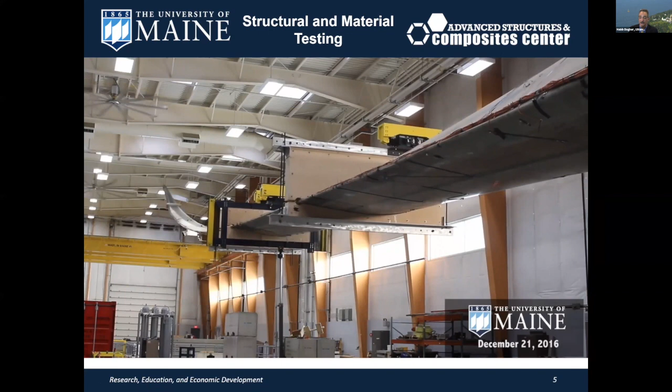To give you a sense of what it looks like inside our lab, this is an example of our wind blade test facility. And we're testing right here 165-foot long wind blades under fatigue loading to simulate 20 to 25 years of life in a very short period of time in our lab. And notice there's one actuator at the bottom moving it up and down, and it's being fatigued at the resonant frequency of the blade. That's how we could move it so easily with one actuator.

This is our wave wind facility. We call it W square wave wind facility. What we do here is we can simulate ocean environments by both simultaneously creating a wave environment as well as a wind environment on top of it. It's the only facility of its kind in the United States. Right below you is a wave basin, and above you is a wind tunnel. It's an open jet wind tunnel.

What you see in the foreground is a floating wind turbine being tested at 1/50 scale. So basically shrinking the size to about 1/50th and testing it in this environment to figure out how the bigger units will perform offshore. This is an example of how we test structures that float in the water, whether it's a boat or testing a way to protect cities from extreme storms.

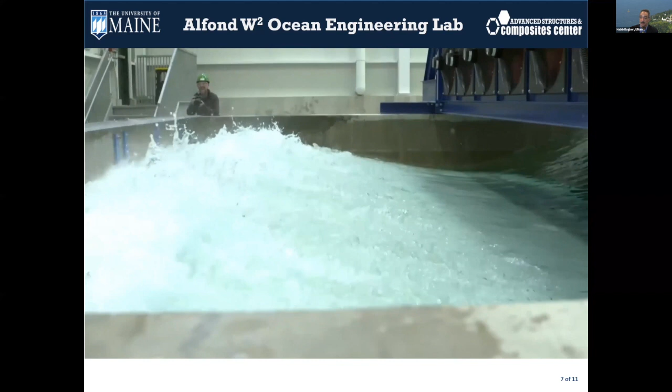But you can see here we can create waves of different heights and different frequencies and different directions. We can make the waves come from different angles. And then on top of that, we create a windstorm. And the wind will change with height, just like it does offshore. So we can change the speed of the wind as you rise above the water. We can change the wind turbulence intensity. So almost recreate, if you wish, an offshore environment in our laboratory to test new technologies that we want to deploy offshore. So if you're ever back in Maine, we'd love to show you that facility.

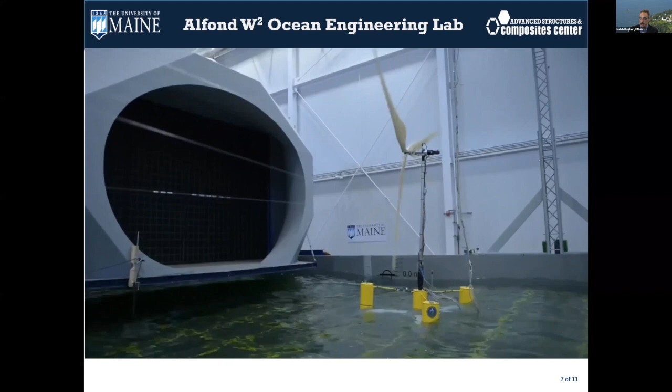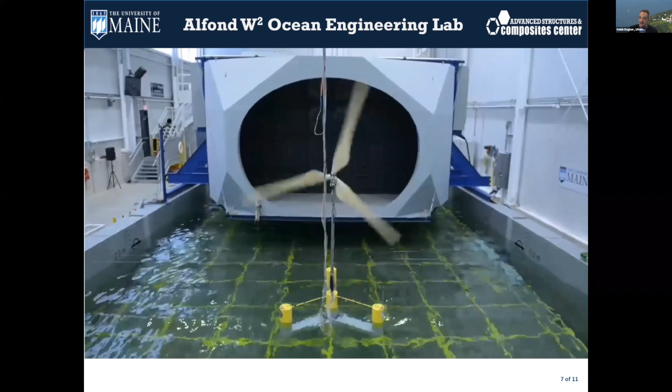This is a 1/50 scale version of a 6 megawatt floating turbine, being subjected to almost a 50-year storm right here. To put things in perspective, a 50-year storm has about 60-foot high waves from peak to trough.

Now let's talk about offshore wind. Offshore wind is a technology that the world is embracing in Europe, in the United States, in Southeast Asia, to help develop clean energy for coastal cities and coastal environments. The majority of the world's big cities are on the coast, and there's a good opportunity here to provide clean energy through offshore wind.

To give you a general idea here, within 50 miles of the US coast, there's enough offshore wind capacity to power the country two times over. In the Gulf of Maine, there's 156 gigawatts of offshore wind capacity, and it takes less than 5 gigawatts to power the state of Maine. That's how much offshore wind capacity that we have. The big issue in Maine is that we have deep waters off of our coast.

In Europe, the first offshore wind farm was erected close to 30 years ago. There's over 5,500 turbines in Europe, but they're all fixed to the seabed because they build them in shallow waters. Maine has deep waters, and anytime you're over 150 feet of water, you can't cost effectively fix the turbines to the seabed. You have to float them. And almost 12 years ago, we developed the first floating offshore wind research team in the country at the University of Maine. I'll tell you more about that later.

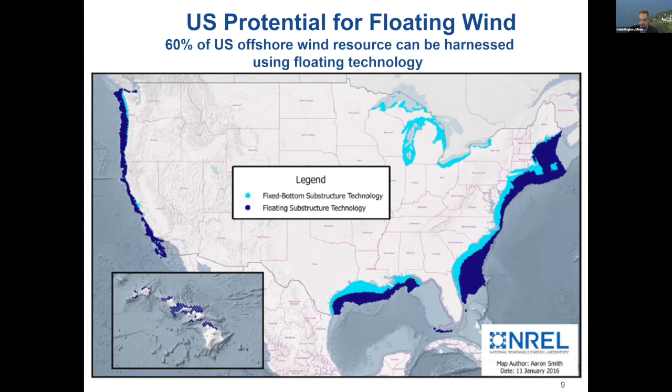So let's go back to Maine a little bit. We started working on offshore wind when gasoline prices, heating oil prices in Maine went up to $4 a gallon back in the first decade of this millennium. And Maine essentially spends close to $3.6 to $5.8 billion per year on fossil fuels. That's heating oil, that's gasoline, that's natural gas. Most of this money leaves the state of Maine because we don't have those resources in Maine.

So we're shipping away every year close to $4 to $5 billion a year, and that leaves the state of Maine. Think about if we can keep some of those dollars in Maine and put them to good use by developing our own renewable energy resources. What we found is offshore wind is the biggest opportunity that the state of Maine has. Not only the only opportunity, but the biggest opportunity.

What we calculated is that if we harnessed only 3% of the Gulf of Maine area, just 3% within 50 miles, we can heat every home and drive every car. So the question really is, where do we pick that 3% so we can electrify heating and transportation in our state?

How do we float wind turbines? There are 3 major categories of floating wind turbines, and the designs are all borrowed from the oil and gas industry. So we've taken floating oil and gas rigs, which have been built for decades, and figured out how to turn them into floating wind turbines. The first family of designs is called the spar. The second is a semi-submersible, and the third is a tension leg platform.

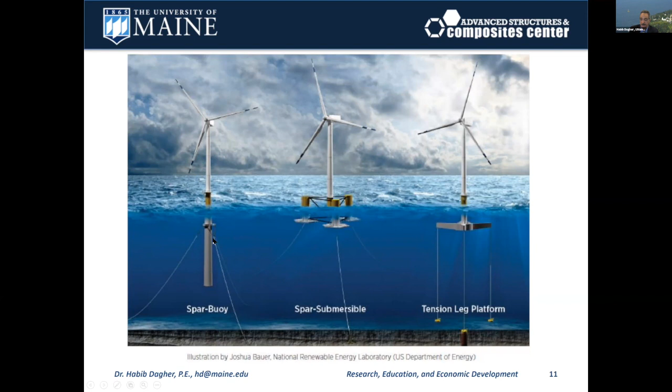Whereas both the semi and the spar can be towed out to sea on their own. I'll show you that in a minute. There's essentially a gold rush right now to design and build floating turbines across the world. There's over 40 designs out there, and they're all competing for a position in this growing industry.

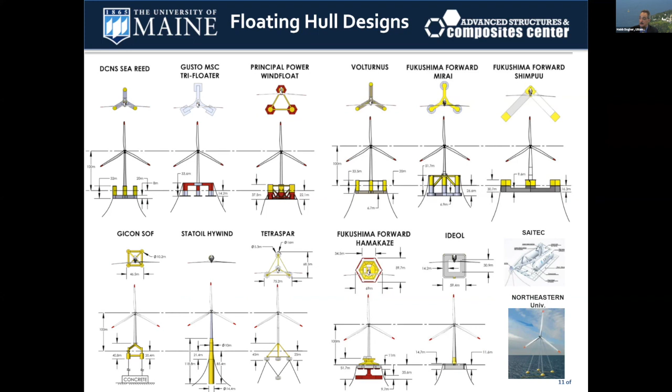There are countries competing with other countries to get floating turbines out there first right now. And in the United States, the University of Maine and the state of Maine are likely to build the very first commercial scale floating turbine and lead the country in that direction.

We started our program about a decade ago, but back in May 2013, Maine made history, and UMaine made history because we built and deployed the first grid-connected offshore wind turbine in the United States. People don't know that, but we did. We built the first one.

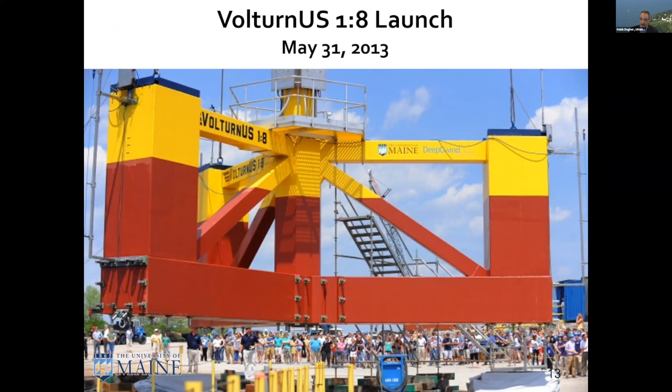So in May 2013, we put this unit in the water. It was made at UMaine in our lab, taken on 3 trucks to Brewer, Maine, assembled in Brewer, Maine by Cianbro, put in the Penobscot River and towed out to sea. And this is how we towed it down the Penobscot River. You could see here we have 3 flotation columns, 1, 2, and 3 in each corner. That's how it works like a trimaran. And this is a 1:8 scale version of the bigger unit. So that's how we towed it out to sea.

And then we got it to Castine and moored it to the seabed. When we got to Castine, we had already pre-installed 3 mooring anchors, 3 mooring lines, and tied it to each corner of the hull. And we had a pre-installed undersea cable that brought the power back to shore. We hooked that up, and we ran that for a year and a half. And because it's a 1:8 scale, it saw very extreme environments in a very short time relative to its size.

And we had over 50 sensors on board. And the purpose of that was to figure out if we can design a hull that will last 500 years in the Gulf of Maine. And the good news is we've proven that we can. And this is an example of one of the first storms we encountered in December 2013. It was called Winter Storm Electra.

So what you see blowing across here is actually snow. This is a snowstorm blowing across. And you can see the size of the waves and the white caps relative to the size of the hull. Remember, this is a 1:8 scale version of the bigger unit. And relative to the size of the hull, these were 60-foot waves. Notice the white caps, and notice that the hull isn't even moving. You can't even see it move in a 50-year storm. And that was the aha moment, that our designs work, our computer models work.

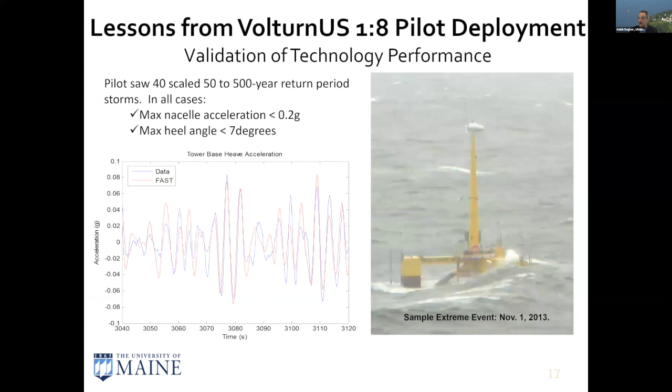And what you see in blue and red are our computer models versus the actual measurements of the motions of the hull. Essentially, we know how to predict the motions of these hulls in these 500-year nor'easters.

So the next step now of the project is to build the bigger one. So we're going to build one unit, just one hull. But it's not just one hull, it's an 11 megawatt unit. It'll be the biggest floating turbine in the world. And each blade in that unit will be the size of a football field. So it's a big unit. And that unit will be capable of providing enough electricity for close to 5,000 to 6,000 Maine households. UMaine has over 60 patents to date on this technology.

And it was designed so we can fabricate it here in Maine. Our goal is to start construction next year and to have it off Monhegan Island to be tested starting in 2023, end of '23, beginning of '24.

The good news is the National Renewable Energy Lab did a study which they published last year, and that showed that this technology, the UMaine technology, when scaled up to full-scale farms, when we're cranking these things out, we can get down to below 6 cents a kilowatt hour. So it's a very competitive energy resource.

Because of all of that, we were joined by two major corporations that are invested in the technology. Each has committed to invest $50 million. One company is called RWE, and the other one is the Mitsubishi Corporation through its subsidiary in the US called the Diamond Generating Corporation and Diamond Offshore Wind.

These two companies are some of the best in the world in their field. RWE is the second largest offshore wind developer in the world. They're a German company. And both of them are investing in Maine to help us build this hull.

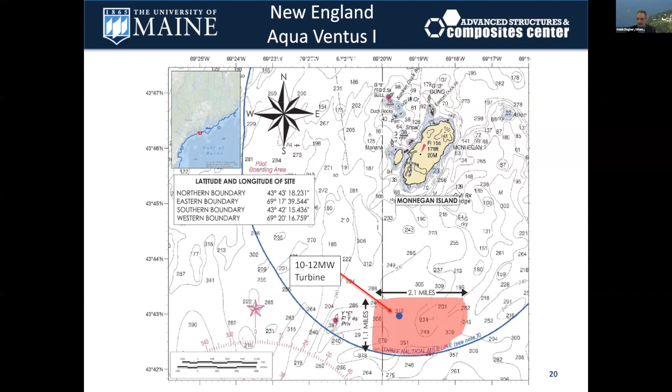This is what's unique about our technology: we can make it locally. And it can be built like a concrete bridge. If you've seen a segmental concrete bridge being built, essentially this is how we're going to build this. So rather than try to develop a technology and figure out how to industrialize it later, we started with an industrialized concrete construction method for bridges and applied it to a hull. So we have an industrialized technology right off the bat.

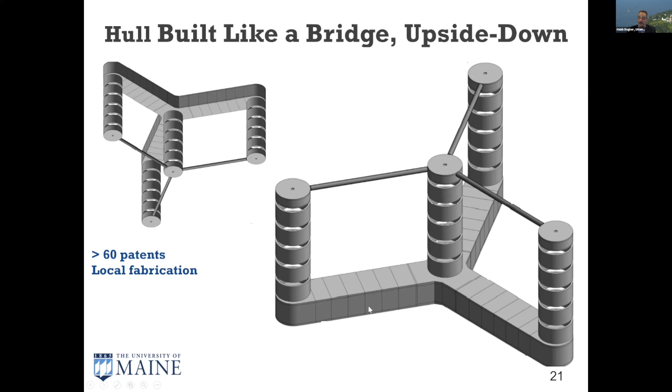And then the superstructure of the bridge, the roadway itself, is made with rectangular boxes that are filled with air as well. They're made near the site, put up there and squeezed together. Now, if you take that bridge and flip it upside down, you've got our hull. So the idea here is to turn bridge builders into hull builders and be able to make it right here in Maine. It's a lot easier to build this than a bridge, because you're starting on the ground and building it up, then put the whole hull in the water and tow it out to sea.

And between each layer, between each can, there's essentially an epoxy. And then there's steel post-tensioning tendons, like big bolts, if you wish, that are squeezed vertically to tie the whole thing together. That's how strong these are when you make bridges out of them. But think about using the same technology to build hulls. That's the invention that Maine has developed.

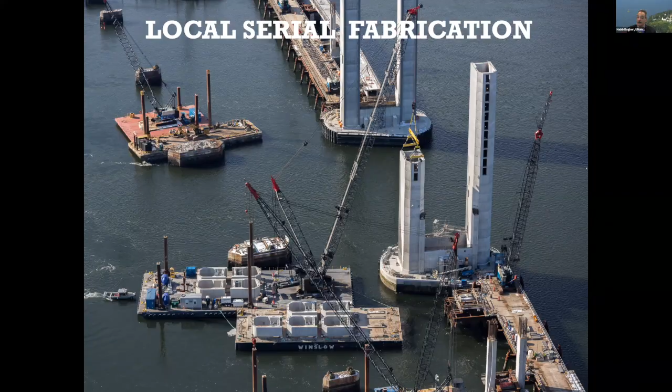Now, the goal here is to try to make some of these boxes and cans in Brewer, or make them in Searsport. And we're also looking potentially at Eastport as one of the facilities to assemble them. In Searsport, the goal is to assemble the hull and tow it out to sea.

Now, how do we moor it to the seabed? We can moor it with steel chains or with synthetic mooring lines. But at the very end, there's an anchor into the seabed. We're likely to be using what we call a drag anchor. This is what it looks like. It looks like a big plow, essentially. And you tow it along the mud with a tugboat. And as you tow it along the mud, it embeds itself into the mud and sets itself in.

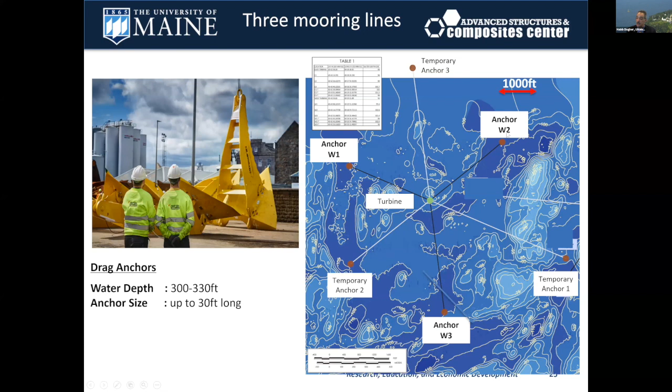It could be embedded 40 feet or so until you have enough tension on the tugboat to hold up the turbine. So you test it out to the tension that you need. And then you hook it up to the turbine. Each turbine will have 3 mooring lines like that on it.

Over the last decade, the University of Maine has been busy collecting data on the environment in the test site off Monhegan Island. We had bird biologists and fish biologists and marine mammal biologists study who lives under the water, above the water. We've taken tags and put them on marine mammals to see where they move around, how they move around.

We've had the New Jersey Audubon work with us and put a radar on Monhegan Island and scan the skies for over a year to look for birds and bats and identify how they fly and where they fly. We also had bird biologists go out there and count the birds and the types of birds that would fly over the test site. So this was the most studied test site from an environmental perspective in the Gulf of Maine that we know of.

After all this data has been collected, now we're going to take a single hull, put it off Monhegan Island, and see how that impacts its environment. We're going to see how the birds' behavior changes. We're going to learn over 5 years afterwards how the fish behavior may change, what the impact might be on the lobster industry. So these are the kinds of studies we're going to be doing under that one turbine, so we can develop the scientific and engineering basis for going the next step.

And to show you the kind of numerical tools we use to design these hulls, we used computer models developed or advanced at the University of Maine to figure out how the hull actually moves with the winds and the waves. And these numerical tools are visualized right here on the top. On the top, you see a 50-year storm, 50-year waves, 60 feet high, coming at the hull. And you can see how the hull moves under these waves. Now, this is exaggerated, so you can see it doesn't move that much.

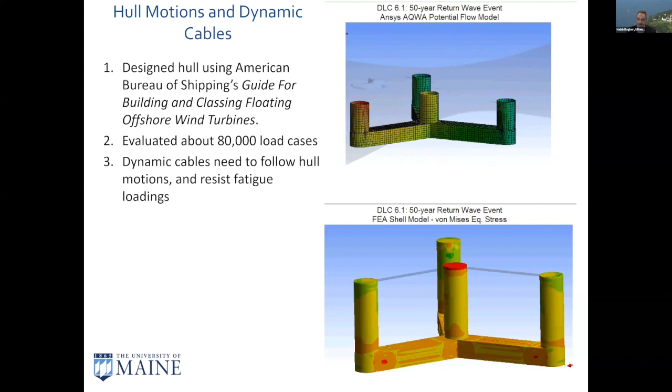How do the electric cables come to shore? Now, typically, if you have a big farm, and hopefully in the 2030s in Maine we'll have those, a big farm might have 50 turbines in it, about a mile apart. What you do is you put them in rows of, say, 10 turbines or so, and each turbine would have a cable coming out of it, but each row would have one collection point. And then each collection point from each row comes together to a collection point offshore, and you have one cable coming back to shore.

Now you try to bury the cable into the seabed to the extent that you can. From each turbine, the cable comes down through what we call a J-tube, and it makes a lazy wave and goes back into the seabed. It's tied to the seabed with a tether or an anchor, and then we try to bury the export cable. For the Monhegan line, we have about a 24-mile export cable for the Monhegan projects, which we plan to bury to the extent that we can.

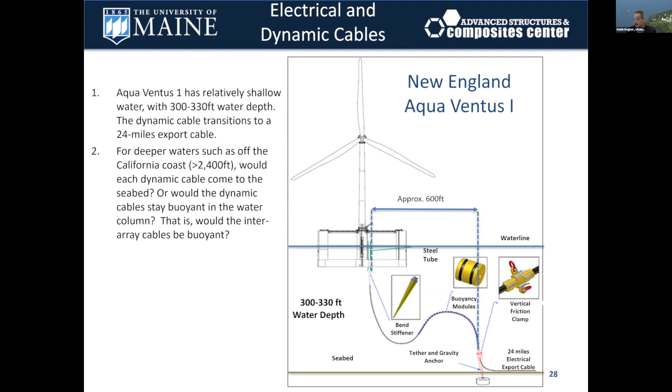Notice what the cables look like. There's a lot of questions that we got asked: would these cables kill the fish, would they have EMFs on them, and so on and so forth. Well, the good news is we've been using these kinds of cables in the Gulf of Maine for decades now.

Give you an example. How do we power the islands off the coast of Maine? Actually, we run cables from the mainland to many islands to power them, and these are similar to the cables we'll be using. For example, Islesboro has had a subsea cable connecting it to Northport since 1955, for over 60 years. And the cable was replaced in 2015. It's a 4-inch diameter cable, and it's buried about 6 feet in the mud.

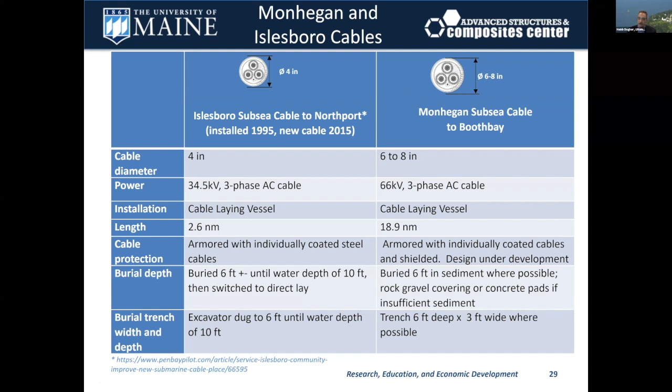Now, our cable will be a bit bigger. It'll be 6 to 8 inches in diameter. You can see it here on the right-hand side. And our goal is to also bury it in the mud to the extent that we can. As you know, in the Gulf of Maine, the seabed has rock outcrops that might prevent us from burying it in certain locations. Now, how do we know how to run the cable, where to run it and how to bury it? You do offshore surveys.

So on the right-hand side is our proposed cable route from the Monhegan Island test site to Boothbay Harbor. We plan to take the cable to Boothbay. And the question is how can we find mud pockets to do it? We've done some studies to figure out where we think the mud pockets are. Then we send ships out there that send seismic waves to the seabed and help us figure out where the mud pockets are. And on the left-hand side is the cable from Islesboro to Northport that's been around for decades.

Our cable on the right-hand side and the cable on the left-hand side are essentially the same. They're both going to be buried the same. Neither the left cable nor the right cable is going to have any bigger impact on the fish or the wildlife. People fish over that cable right now off Islesboro and have been for decades.

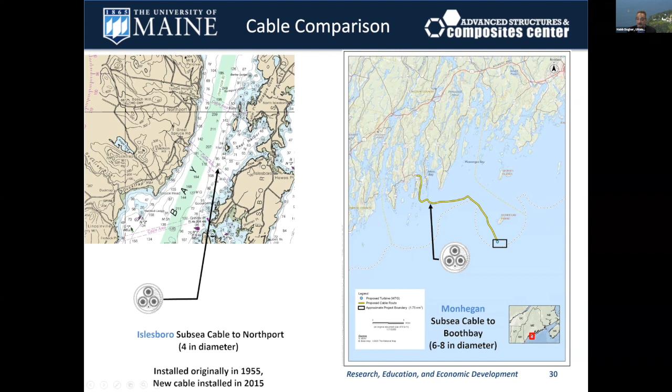Now, how do we know if we can bury the cable? As I said, we did a survey. We ran specialized vessels that send seismic waves and other types of waves to the seabed to figure out what the seabed looks like. We did that last month in April, and we're analyzing this data as we speak, in real time. This is just a snapshot of the data we've collected to give you a sense of the resolution of the data.

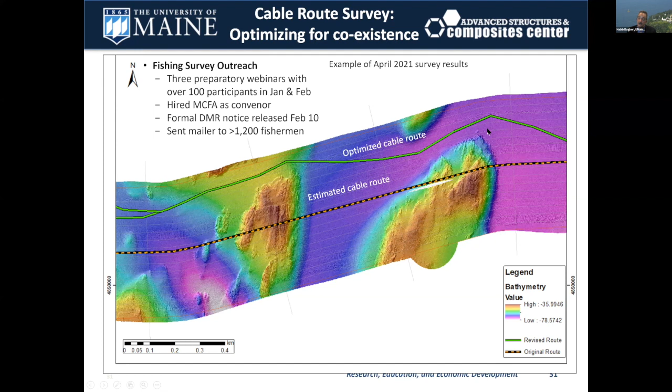What you see in brown and yellow and green are outcrops where you have rocks. What you see in purple are essentially deposits of sand and mud. Initially, we planned to have the survey along the line that's dotted. And after we've run the survey, we're going to try to move the line to the green location, where there are mud pockets, so we can bury the cable 6 feet and allow most fishing to take place normally there.

Notice that these are big units. These are very big, and they're tensioned to hold up the hull. And therefore, they're not going to move around. You're not going to have a whale or a marine mammal getting tangled up in that. It's not like a very small fishing line. So there's a lot of tension in it.

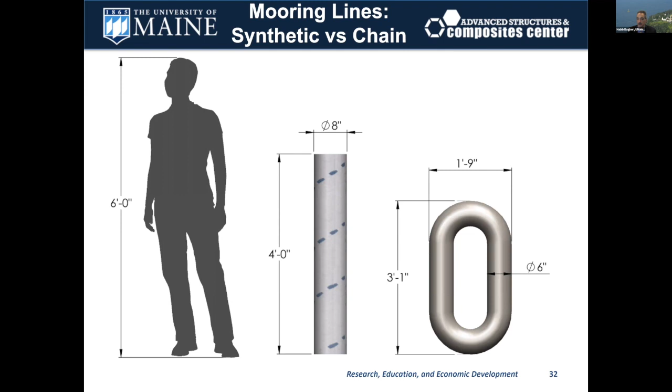It's very big. And experience has shown us over decades in the oil and gas industry, which has used these kinds of mooring systems, that the marine mammals and the whales go around them. They don't run into them. We have videos of whales going around these in the oil and gas industry. Now, this has been a long history in the state of Maine.

This has not just happened overnight. I've been at it for 12 years, and I'm the old person in the room right now in offshore wind in Maine. But back in 2008, the governor, Governor Baldacci at the time, put together an ocean energy task force, which I served on with Angus King and many others. It was a bipartisan task force. They put a report together that recommended 5 gigawatts of offshore wind in the Gulf of Maine to electrify heating

Following that, in 2010, Maine voters actually voted to provide the university $11 million to get going and design some technologies and do the demonstration project. So we are under a unanimous mandate by the legislature, and a vote by the people of Maine to do this. So we're doing what the people of Maine have asked us to do for the last 10 years.

Today, in this last couple of years, Governor Mills has put some ambitious targets to achieve state carbon neutrality by 2045. To do that, we need offshore wind. We also need other forms of renewable energy to work together, but offshore wind is key to get there. So what's the state of Maine plan? The state of Maine is developing an offshore wind plan right now by working with constituents across the state and all users of the sea. And the plan calls for crawl before you walk, walk before you run, do it right.

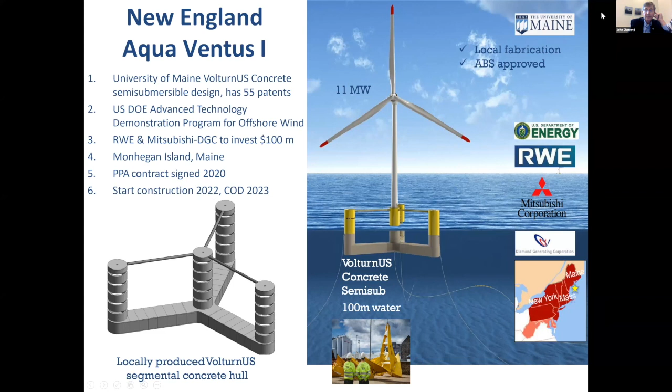Question: is there any practical application for integrating a submerged turbine suspended below the floating platform? For example, to have two power generating devices on the same platform? Very good question, actually. Thanks for asking that. We've looked at that, actually. We've looked at to see if we can locate wave energy devices and tidal energy devices or current energy devices on this. You can, but it's not quite clear that it's cost effective. I think the more energy generation devices you have, the more complex the system is, the more O&M you have to do. But it's certainly worthwhile studying further. It's on our radar screen. Thanks for asking the question.

Very good. Question, and you've addressed this a little bit, but could you elaborate a little bit more on the concerns of some in the fishing industry about this project, specifically the research array? Could you talk about not only what those concerns are, but also explain more about what the university is working on to help the fishing industry navigate in and around the research array? Sure, I'll take a first crack at it, and I'll hand it over to Genevieve, because Genevieve lives and breathes the fishing industry. Representative Genevieve McDonald, I had a great pleasure to work with her, and she's brought a lot of the concerns from the fishing industry to us.

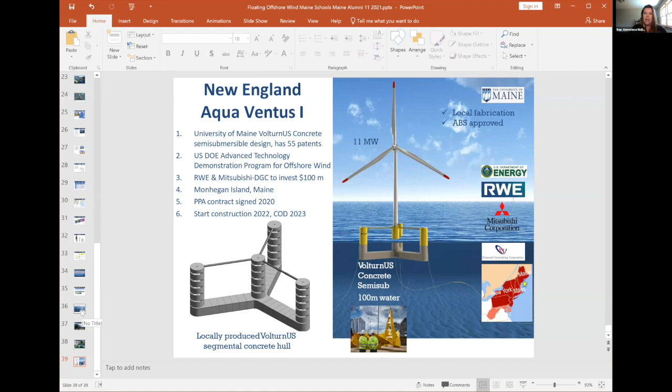So to the environmental impacts, there is a NEPA process, there is an environmental review and assessment that is part of the permitting process. And so I think a lot of those questions will get answered as this process moves along, both for Monhegan and for the research array. And then to speak to displacement, the fishing industry is really concerned about the development that we've seen in Southern New England and in the Mid-Atlantic. These are really big commercial scale leases, and they have displaced fishermen in those areas.

And so I would say that the scale that Maine is working at, to start with a single turbine and test the feasibility, how close can fishermen feasibly operate, and then expanding that to a 12 turbine research array, still taking those considerations into conversations, into dialogue, into stakeholder engagement, and really seeing how we can coexist is the right path forward.

Thank you, Representative McDonald. Thank you for your leadership in the legislature on this issue as well. Thank you. I'm going to go back and listen to the rest of that hearing when we finish here. Yeah, I need to get back and give my testimony too. Oh, right. I'll run through these other questions then too.

Question about the choice of the Monhegan site. What led you to choose that site, and what role will the Monhegan site play in the development of the research array? Thank you. Excellent question. The Monhegan site was selected in the state through a process that was put together by the state of Maine, where they've looked at over 10 different sites in state waters where we can do research testing. They've talked to fishermen, they've talked to local fishing communities and environmental interests, and had dozens of meetings along the coast to figure out where we can do a demonstration project.